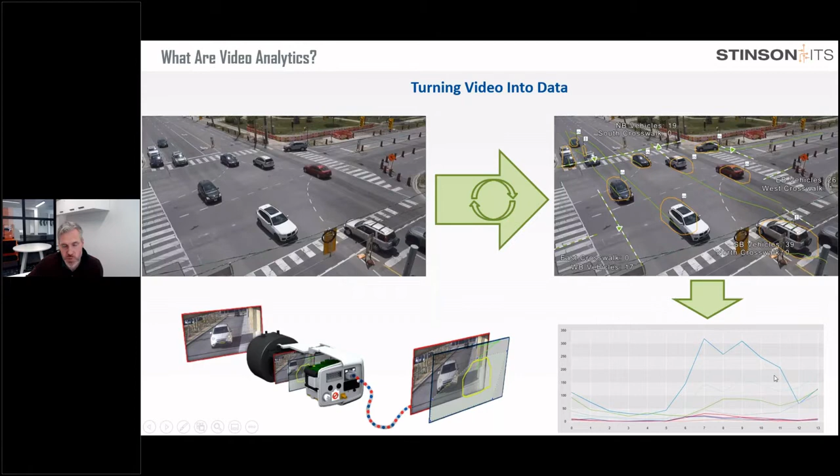So a bit of background on where analytics came from. They very much started in the security industry. CCTV has typically just been a security device that monitors a facility and provides security alerts, giving companies the ability to record video and monitor live footage of their offices and stuff like that.

When analytics were first developed, they were a little bit more simple, usually focused around movement. Because all systems were typically at a single facility, wired directly back to a single server, it made a lot of sense to deploy analytics at the server. Since they're all centrally processed and recorded there, processing power is available, that's where analytics were typically deployed. The big pros are lots of processing power available in a server, and streams are often recorded, so you can process things after the fact on recorded video.

Now, edge analytics is the next step we've seen in the last 10 years or so. As that processing power moves out, cameras are starting to become distributed across wider networks, not just at a single facility, and there's a need to do intelligence in remote areas. When you're doing server-based analytics, the key part is you have to be streaming live, high-quality video back to the server in order for it to run, because the analytics are only as good as the frame rate and resolution you're getting from the camera. So it put a lot of limitations on analytics that could be performed at a distance.

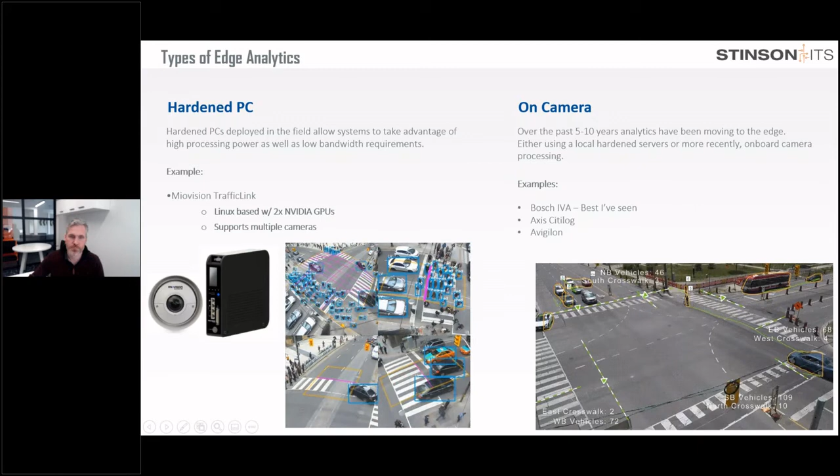So just to look at how analytics are set up - that's one of the big values of Bosch, it's kind of the good and the bad, because it's very customizable. You can set up a wide variety of rules. It mentions 16 different video analytics rules, and 8 of them can be set in parallel. So you can be counting in 8 separate areas, or looking for presence over here and counting over here, and it can all do it simultaneously.

The challenge with that is it takes a lot of experience in configuration to know how to tune those correctly and set them up correctly. So it's a bit of a curse sometimes, because it's too much information for some customers, since it can apply to such a variety of industries, not just traffic. Often it's difficult to know how to properly configure these zones to make them work and do what you want properly.

But these analytics can run on either thermal or optical cameras. Essentially, the process is to set up a rule, and then you can filter based on size, speed, directionality, color, or object classification. That ensures the rule is operating correctly and reduces false calls as much as possible.

At that point, you hopefully have good data, and that data is then ingested. It can be locally controlling something, but more often than not, it's remotely sent to a VMS or an ATMS system. Bosch does have their own cloud as well for data ingestion and analysis. Systems like Genetec support Bosch right out of the box.

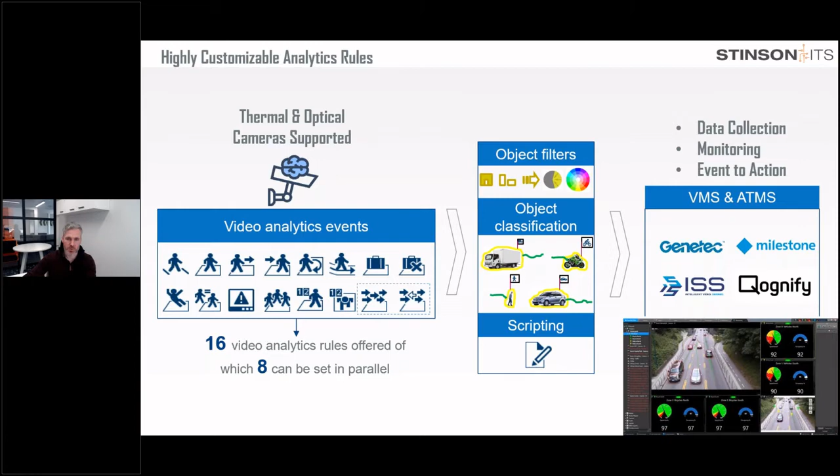So if you want to view your speeds or your counts or data, it can pull right into Genetec and you create dashboards, etc. This is just a quick look at what the Bosch interface looks like.

You basically have the live stream. You can select the rule, and we'll get into this more at the live stream, but you select the rule, select some filtering, and then you just keep adding different tasks that you want to do, and you're off to the races.

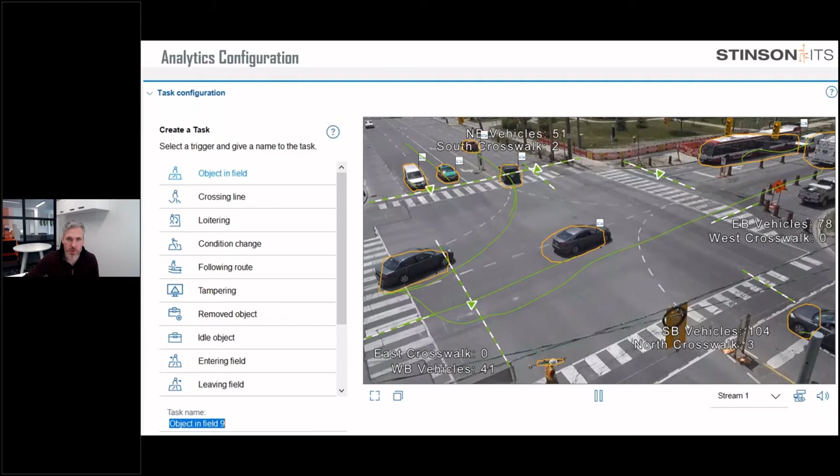So the meat that I wanted to talk about today in this webinar was focusing in on the cool ITS applications that are starting to become possible because of analytics like this. And certainly for me, we do a lot of consultation, and customers will often come to us with challenges to say, I want to do this, how can I do it?

So we're often challenged to go and look for different creative ways to perform or solve a problem. And more often than ever before, we're coming across problems where Bosch and the analytics involved do have the opportunity to solve some of these challenging problems. So I'm going to highlight 4 key problems that have been very specifically addressed by Bosch. We've designed a number of systems related to this, and we anticipate being quite successful in performing this.

So the first is ped and cyclist counting. This has always been a challenge because radar is not very good at picking up those. While systems like Miovision and video detection systems at intersections are very good at counting these objects, they are very expensive. So if you want to count on a multi-use path, putting in a full-blown system like Miovision is a bit pricey. So we see smaller, simpler cameras like a Bosch, a few thousand dollars, to perform the same task. And so we see an opportunity to deploy those sensors in that space.

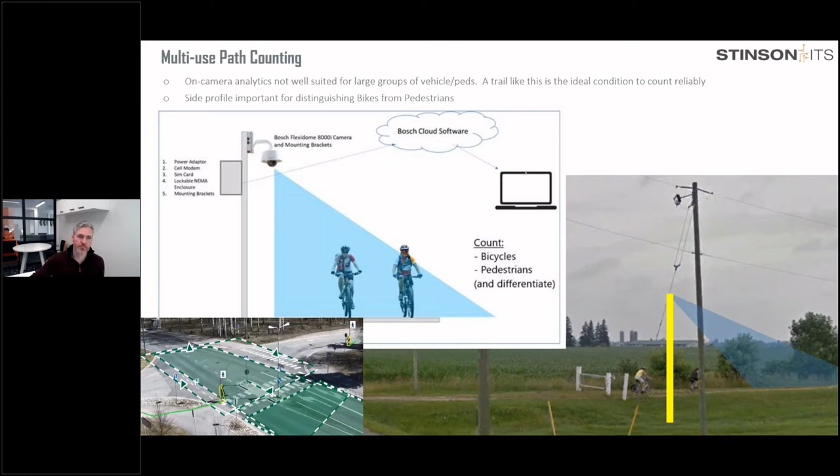Another one is warning systems focused on pedestrians and cyclists. This is one we designed a few months ago where a customer had a rural highway on kind of a blind curve, and they had a number of conflict incidents, and even a few collisions with pedestrians and cyclists and vehicles coming around that corner, not noticing them. Because they have a general store and some other commercial activity at the side of the road, there's often peds and bikes driving up and down.

So the concept here is detect them with a camera. We'd also have verification cameras to zoom in a little more and track those objects. The idea is recognize pedestrians and cyclists, and then wirelessly activate warning beacons on the two approaches so that vehicles know that pedestrians are ahead.

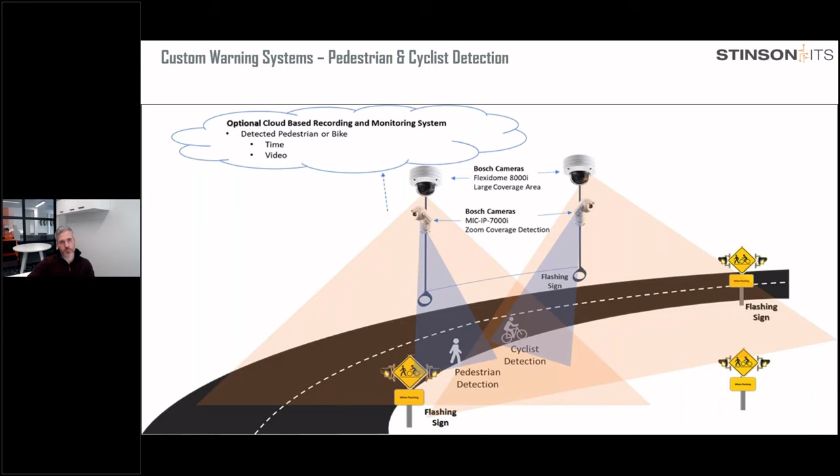This is just an overview of that blind curve. So you had pedestrian traffic along the highway here and very fast vehicles coming around the corner. So it's just a way to warn them, and it's not an easy way to detect pedestrians traditionally. So this was an interesting use case.

Something similar here as well is truck detection. In the past, truck detection has been somewhat of a challenge. The primary method is through overheight detection, but in certain scenarios like this one, you can't easily filter out for just the traffic you want to see.

So this is a customer that wanted to warn about another blind curve with a small road that would enter on the curve. As trucks were pulling out, taking a left or right from this exit, or trucks entering that road would block and potentially cause a hazard. There's a number of conflicting events between vehicles traveling down this main road and trucks turning in or out of that side road.

While we could technically put an overheight system here and detect trucks exiting from that road, you wouldn't be able to detect trucks taking a left here because through traffic would detect that as well. So Bosch offered an interesting solution to be able to detect in both those zones economically and provide warning to the remote signs. Let me just jump to the next screen.

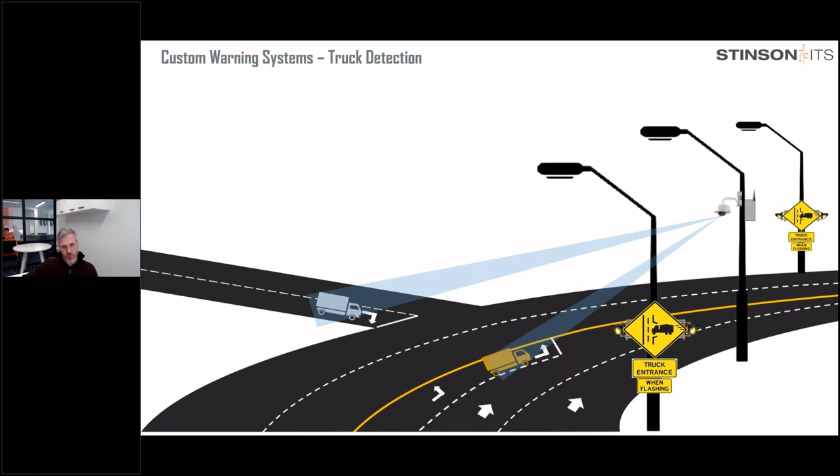So this is an overview. What we decided to propose was a camera on a pole watching both of these zones, the left turning lane and the left and right turning lane from the side road, with wireless connections out to these warning signs. So we filter and say, is there a truck inside this zone or inside this zone?

If so, activate an alarm, which is tied to a digital output on the camera, which then locally triggers these warning signs wirelessly.

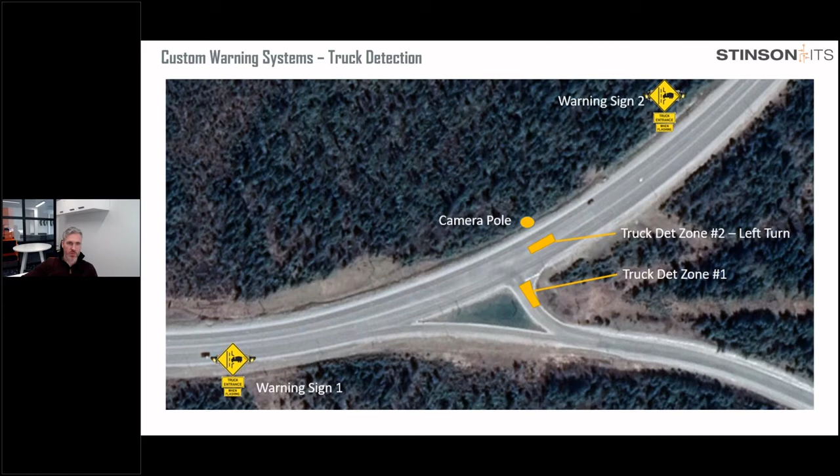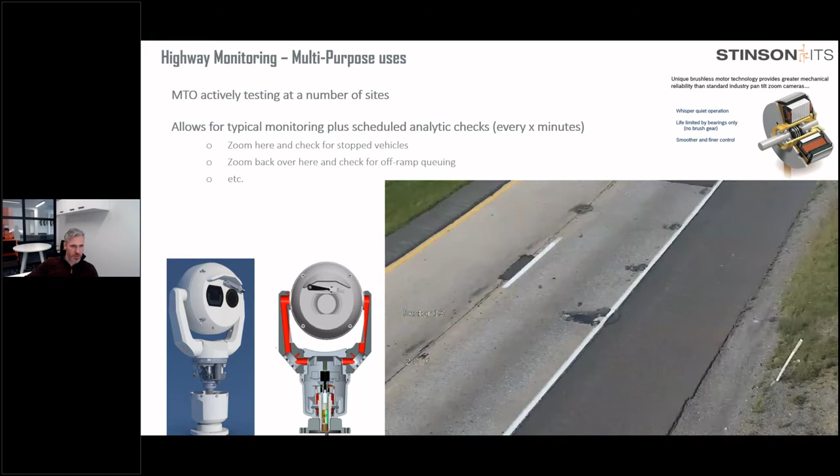So now this is the third one that I've come across, and highway monitoring has been around for a long time. I just haven't seen it done very well. So the big advantage to Bosch, this is actually a picture - I didn't really get too much into the camera models, but this is Bosch's most popular one for traffic industries.

They call it the MIC. This has either an optical, a thermal, or both image sensors embedded in it, and is very good at high resolution, 4K or better, with really powerful zoom. The big key with this device is that it can very accurately PTZ around an image, and so much so that it can go back to the same point.

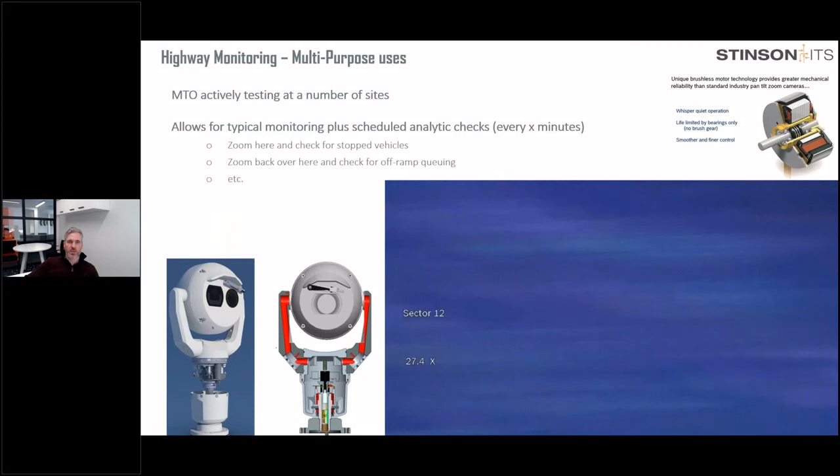You'll see analytics become activated as it jumps through its various pre-positions. So the value in a camera like this is you can do your basic monitoring of the roadway, and then periodically have the camera automatically jump around and inspect its surroundings to look for stopped vehicles or other offending vehicles and send alerts accordingly, then have it jump back to its normal monitoring operation. So you can get multiple purposes out of a single camera.

I do know that the MTO has deployed quite a few of these. I keep seeing them pop up more and more at the side of the road, and a number of cities have these as well. But we are not involved in that testing.

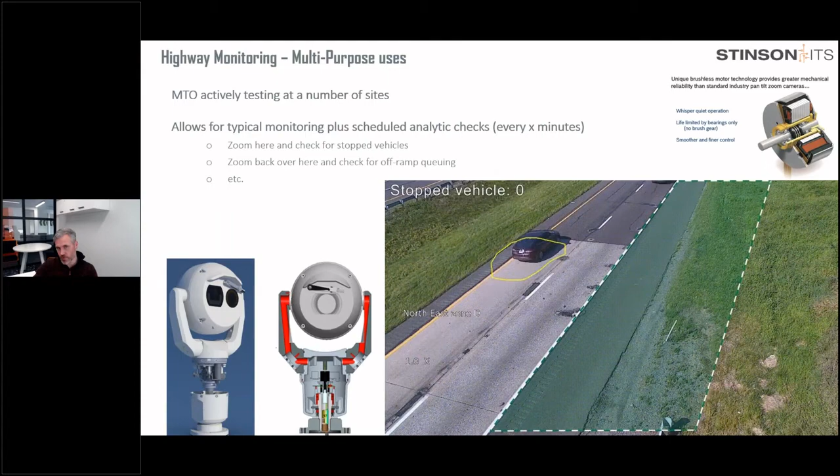And the final one I wanted to talk about was the camera training. This one's really cool, but again, we don't have a ton of experience with it, but it did come up recently, so I wanted to point it out.

What this allows you to do - if you're familiar with machine learning and computer vision, a lot of it's focused on training an algorithm to recognize certain objects based on characteristics of the image or of the object. The way it works is you teach the camera by feeding it positive or negative images of what a car looks like or what a car doesn't look like. Through continuous training and feeding of those images, the algorithm starts to know what a car looks like and can then detect and track it automatically.

So usually that's all done on the back end by camera manufacturers, but there's a cool feature in Bosch cameras that keeps getting better and better. It allows you to submit your own training images to a camera, feeding it positive or negative images of what you want it to detect, and after 30, 40, 50 images, however many it takes, it will learn to recognize the condition you're trying to track.

The basic example we've seen in their manuals focuses on security applications, like a gate. You teach it what a gate-up condition looks like and what a gate-down condition looks like, so it can alert you or track how often the gate opens in a day.

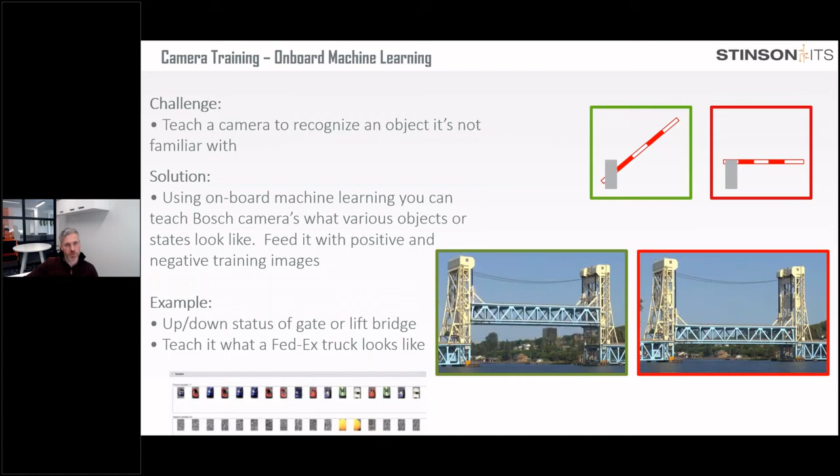We're very focused on ITS, so we don't get as involved with these other ones, but of course the analytics can be used for a lot of different stuff: smart parking for occupancy, knowing how many spots are open, enforcing no parking zones, enforcing no stopping zones on highways or arterial roads, wrong way traffic detection (typically with thermal cameras), curbside management like enforcing taxi-only zones, and pedestrian detection. Counting pedestrians on a crosswalk is difficult with onboard analytics, but just knowing if someone is there or not is something these systems are quite good at.

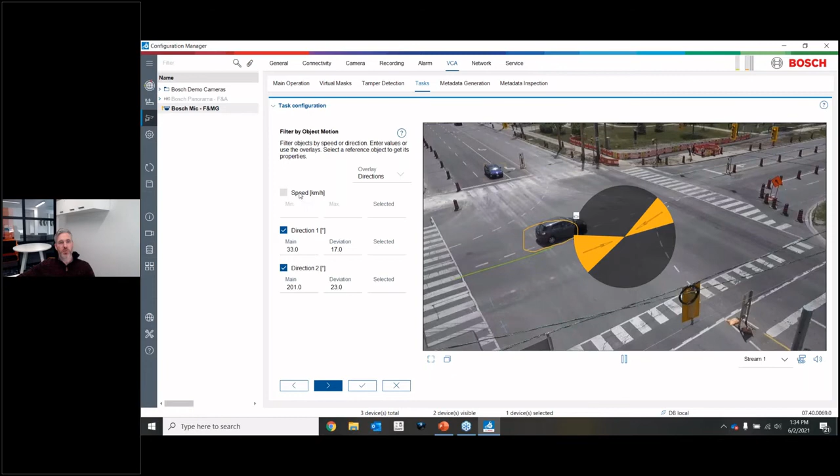You can also filter by speed—of course speed's not going to be perfectly accurate in a video situation, but you can filter by that as well. Now, I haven't really used this much, but if you wanted to detect only school buses or only yellow taxis, you could filter by the color of the object.

And then you can do debouncing—so if people are momentarily passing through a zone and you want it to trigger only when they're in the zone for a few seconds, you put in a debounce, saying it must be in there for at least a few seconds or a few milliseconds.

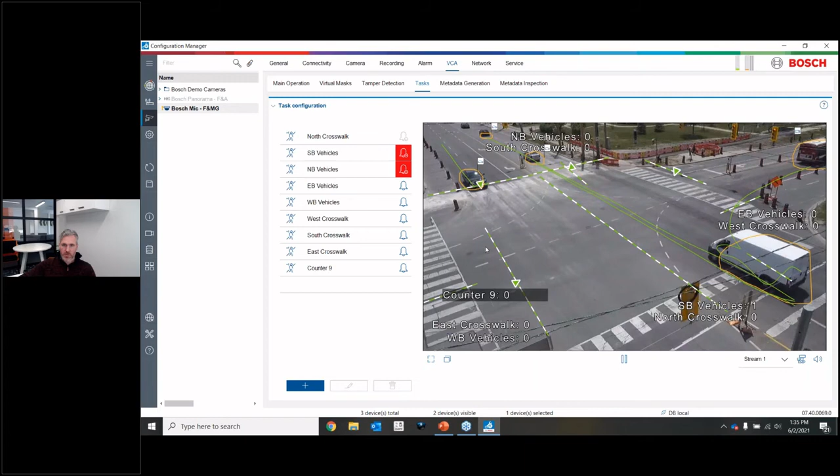And that's it. Now we have a line across there—this is the generic counter, number 9—so if an object crosses through there, it starts counting. That's what you're seeing: as objects pass through these lines, they begin aggregating these different counts. If I look at the east crosswalk, this one is designed with a bit of debounce, but it's focused on upright people only, no other classifications.

So I am not going to save those changes. That's an example of this configuration, how that worked.

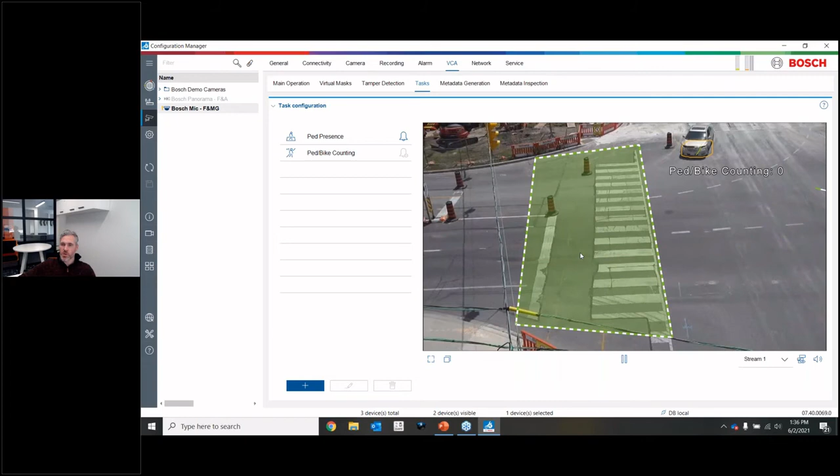I can pull up another example. This is a PTZ camera, so I've set up another view with different analytics. As you saw in the tasks, you can have up to 8 different analytics enabled at the same time. In this case, I only have 2 enabled: ped/bike counting and ped presence. This is kind of focused on the idea of an extended green when a pedestrian's in the crosswalk. We're seeing this in crosswalks more often, using intelligence to tell when someone's present and activate automatically or extend a light.

I don't know that we're going to see anybody cross here, but I did have a little clip I took to show you what it would look like. Let's just let it play for a moment. You see in the bottom left here, somebody coming in, and if they're in the zone for more than 2 seconds, they will trigger the presence zone. The zone turning red is just an indication that the alarm is being triggered, and that information could be used by a system to react to that.

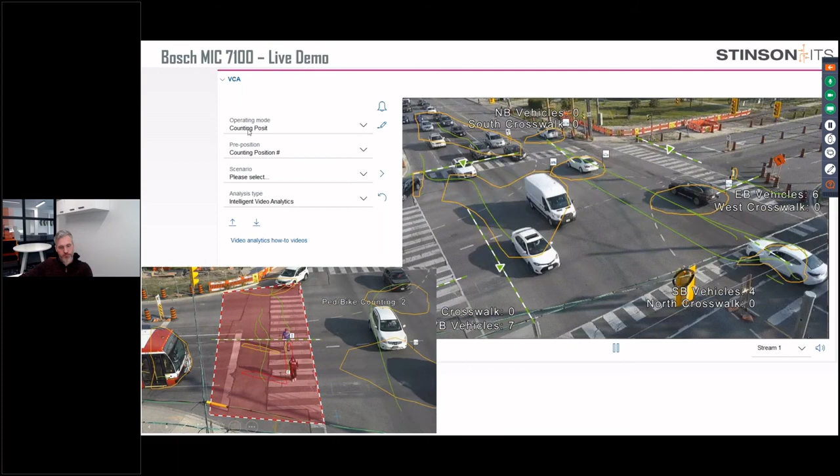So that's it for the analytics. Oh wow, look there, there's a nice conflict. This is a construction zone, and these lanes are being shifted all the time. I wish we saw that a little sooner.

So the final thing I wanted to show you guys is the zoom ability of these cameras. This MIC is quite impressive. If you jump in on, I just did a zoom example.

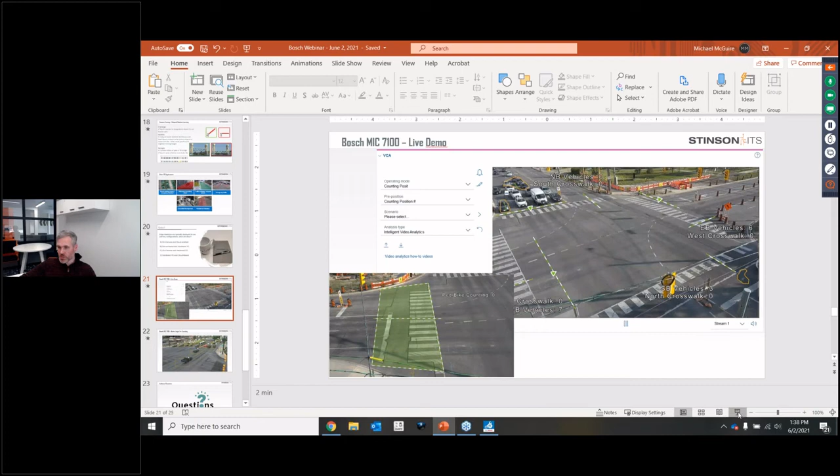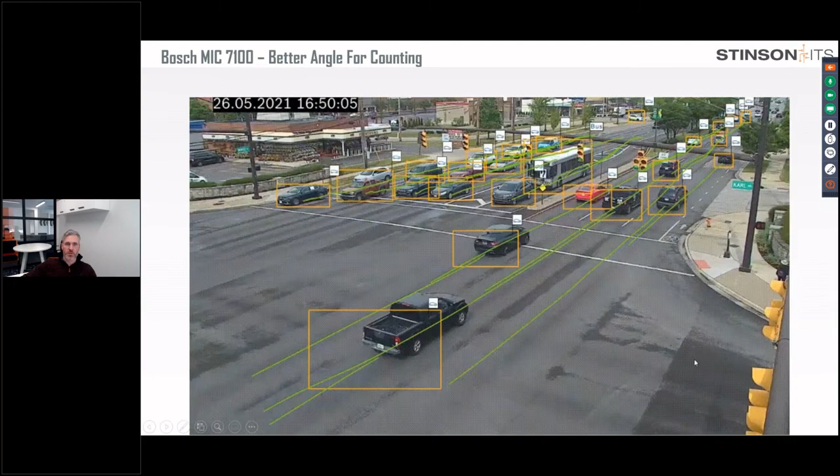So let's jump back into the presentation. That's basically it. There was one video the Bosch guys shared with me yesterday that I was going to pass along to you. It was an example of counting at the angle I was telling you about. This is footage they sent me where you're focusing on just a single approach, instead of trying to watch all the vehicle traffic through an intersection. Focusing on only a single road does seem to work a little bit better. In this case, they are detecting a bus as a unique object. That must be a new firmware because the camera I have out there doesn't do that.

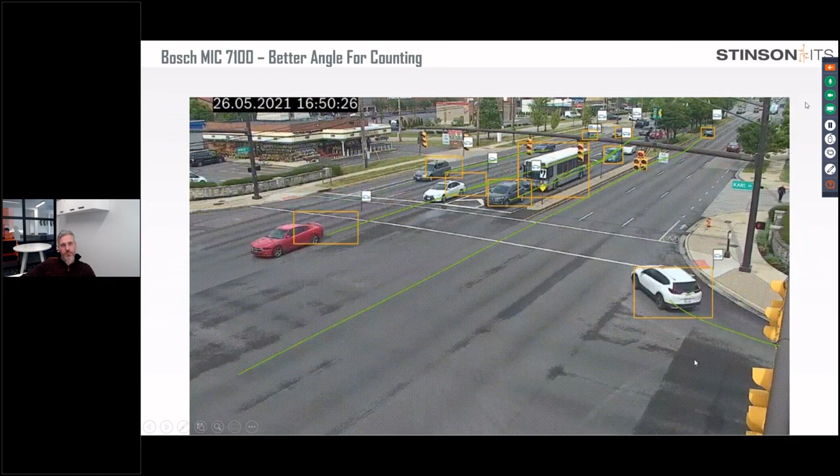Yeah, so we do have some questions. The first one was, are the Bosch Edge cameras power friendly, and are they able to be on a solar powered trailer for extended periods of time? Yes, they are. It's going to depend on the model you get. The analytics is available on cameras as cheap as around $1,500 for very basic non-PTZ fixed dome cameras, up to PTZ mid-level, which is kind of the traditional access camera you'd see. And then what Bosch is really popular for is that MIC camera, which has no bubble, no dome, and that one has a very strong motor in it. So that one's a little bit on the edge of what you'd put on a camera trailer, but the mid to lower end models consume anywhere from about 7 to 14 watts of power. We've got a number of camera trailers using these cameras.

Someone asked, can you address the alert/output/option/formats or input/output triggers? So for the output, there's a couple of options. There is an API or an XML feed that's continuously being generated by the cameras. If you want to do a back-end API integration of a camera and develop your own software to monitor the status of a certain alarm field, you can do that. We do that in some scenarios where we want to do more intelligent interactions with the system, automating, when something happens here, trigger a VMS sign up the street. That's what we would use that for. Alternatively, you can trigger locally via digital I/O.